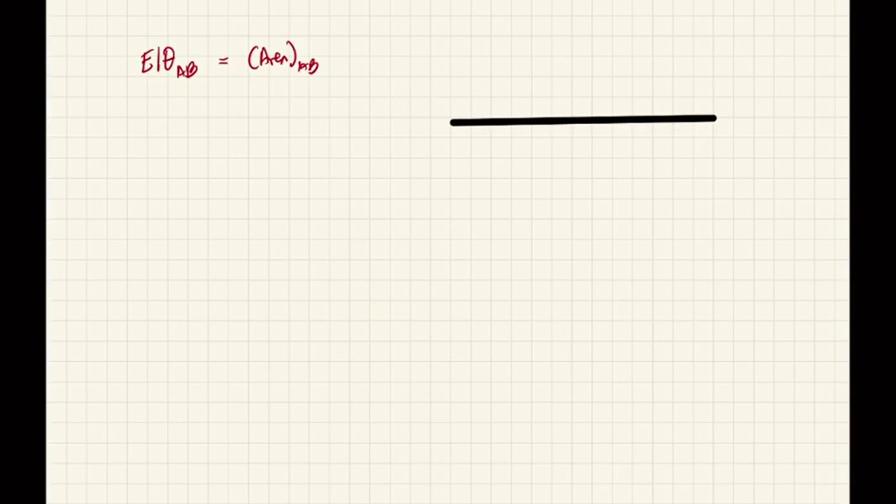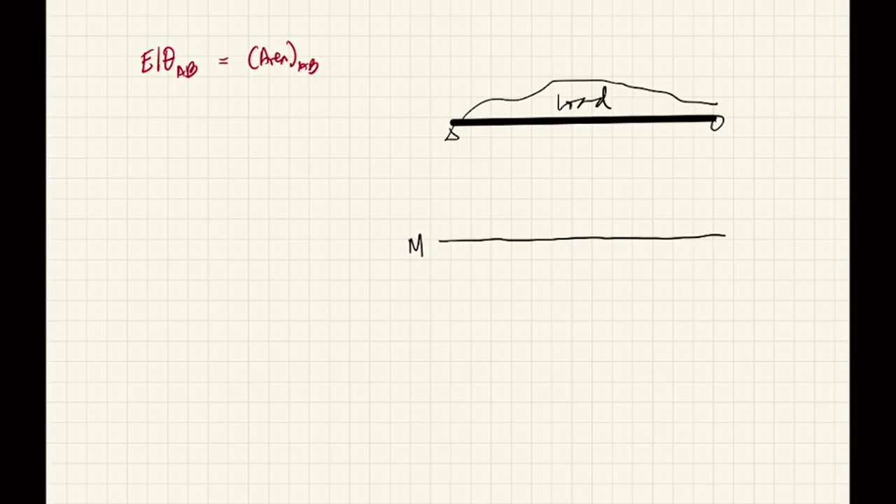Okay, let's say meron tayong beam. Tapos, let's say ganito na lang, merong loading, that's load, kung ano man yan. Tapos, gagawa natin ng moment diagram. Hindi ko na ituturo gumawa ng moment diagram by parts, kasi I believe na nakuha nyo na yung skill na yun sa college. So hindi na natin ituturo yun dito. Let's say moment diagram neto is ganito, ganyan, o kung ano man load yan, that causes yan. That's your moment diagram. Ngayon, let's say ibaba natin ng konti ito.

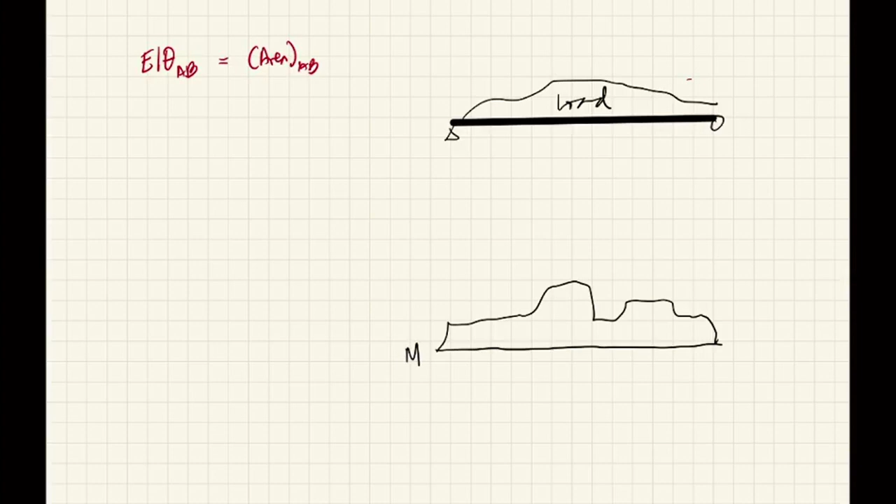Okay, tapos let's say this is because of this loading, ito yung elastic curve ngayon ng iyong beam. Mag-assign na lang tayo ng dalawang points A and B. Let's say this is point A, and this is point B.

Okay, kailangan, itong EI, that's flexural rigidity, EI. And itong theta - theta is change in slope, not the slope themselves, change in slope between A to B.

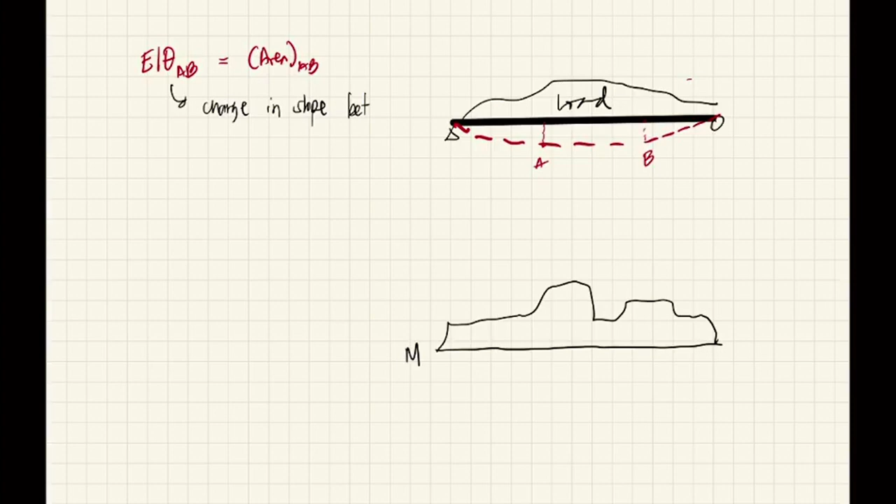Ano ibig sabihin nun? Let's say na ito yung slope mo for point A, let's say that's your slope for point A, assume nila na tumama. Tapos, this is point B. So that's point B. Tapos, ang slope mo sa point B ay ito, tumama na lang din. Teka, zoom natin ng konti.

So, yung sinasabi natin dito na theta, ito yun. This is your change in theta between A to B. Nagbago siya, diba? Yung slope natin sa A is going downward, pabulusok, while your slope dun sa B is paangat. Ibig sabihin, bumangon yung slope mo. Okay, yan ang ibig sabihin ng positive na theta. Ibig sabihin, your slope is, from your first point, downward, tapos your slope became upward. That is positive theta.

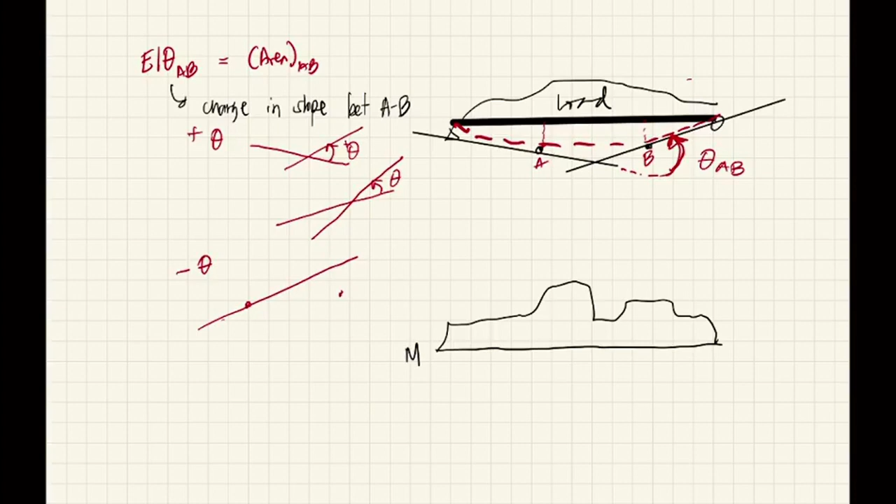Or siguro, if your slope is already rising from the first point, pero umangat pa siya, ganyan yung ibig sabihin ng positive theta. Ibig sabihin, basta yung positive theta na AB, ang ibig sabihin yan is nag-rotate pa counterclockwise yung iyong slope. Ibig sabihin, umangat, bumangon, lalong tumaas. Pero kapag ka naman negative theta ang pinag-uusapan natin, ibig sabihin, from one point rising yung slope mo, and from the other, ipababa yung slope mo. Ibig sabihin, probably ang shape ng beam mo dyan is ganito. Malungkot ang beam mo, kasi rising na siya, tapos bigla siyang bumulusok ulit. So, this is a negative theta.

Okay, so dapat ay alam nyo na kung ano yung sign convention natin sa theta at saka sa deviation. So, paano kinukuha itong theta na to? Ang sabi, kumpitin mo lang yung area dun sa AB. Ibig sabihin, kumpitin mo lang yung area dun sa moment diagram.

Teka, parang maganda i-highlight na lang yun. That is your area AB. Divide mo na sa EI. This is your area AB, divide mo lang sa EI. From A to B is equal to the area between A to B times the moment arm relative to point A. Anong ibig sabihin na naman nun?

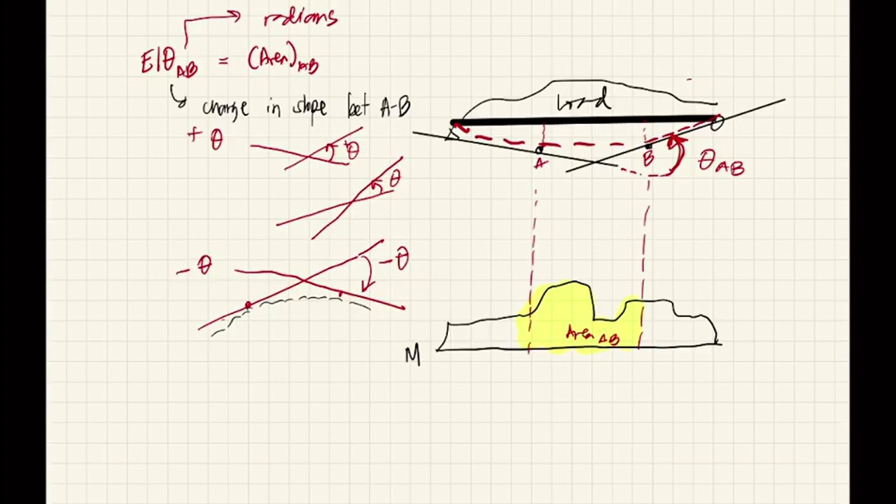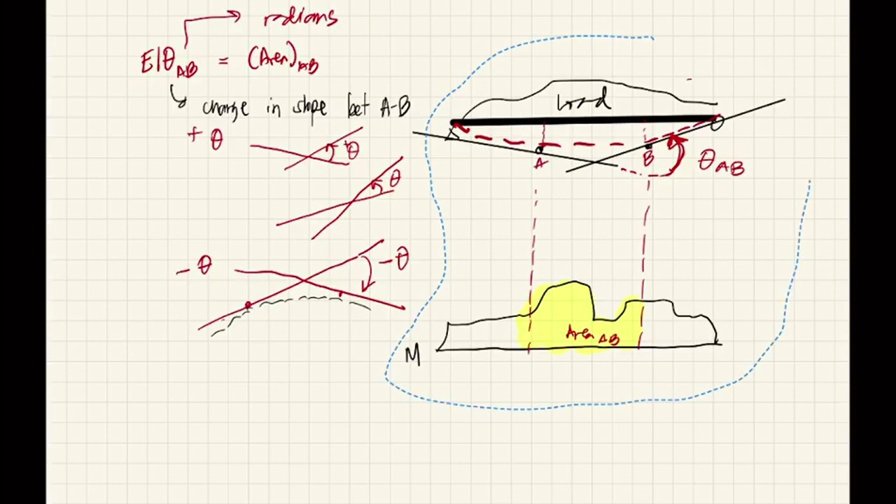Okay, so dyan ulit tayo sa workspace natin. Paliwanag natin ulit. Tapos, siguro mag-next page na lang tayo. Pero kunin natin yung figure. Ito, kunin natin. Teka, dapat na bang kunin to? So, anyway.

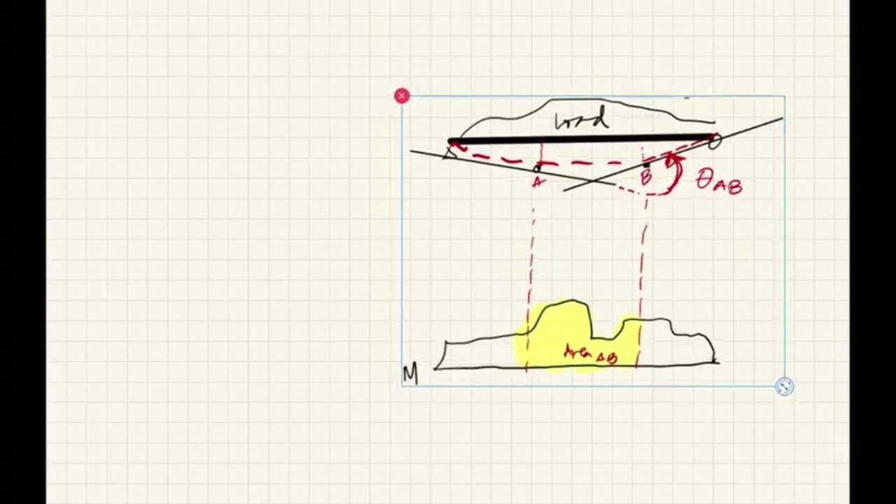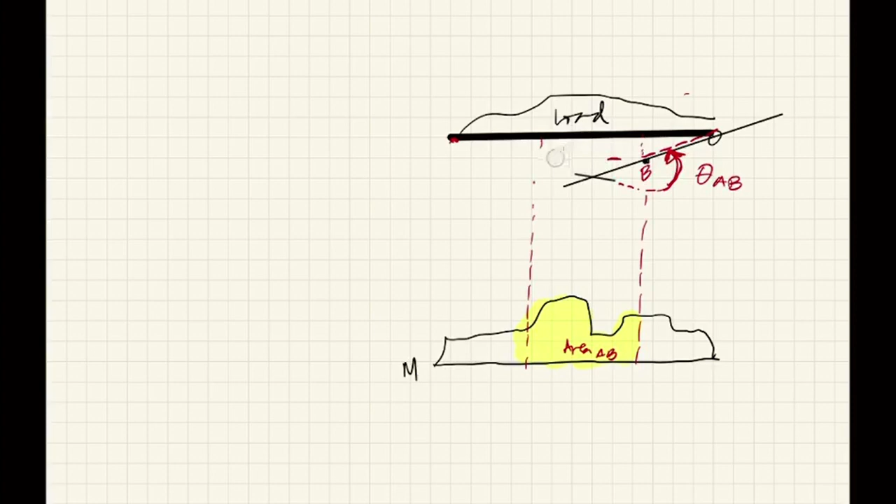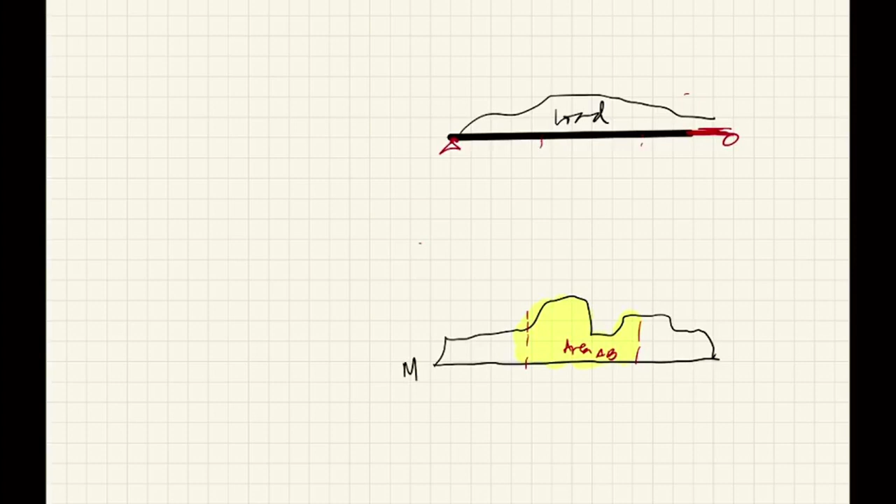Teka, focus naman tayo sa deviation. Napapansin nyo na sa area moment diagram, syempre, hindi ka makakapag-proceed sa solution kung hindi maayos ang moment diagram mo. Okay, so mahalaga na marunong ka mag-drawing ng moment diagram ng tama. Dito sa example natin, we have that beam. Tapos, ayun ulit, let's say this is its elastic curve because of the load na naka-apply dun sa beam.

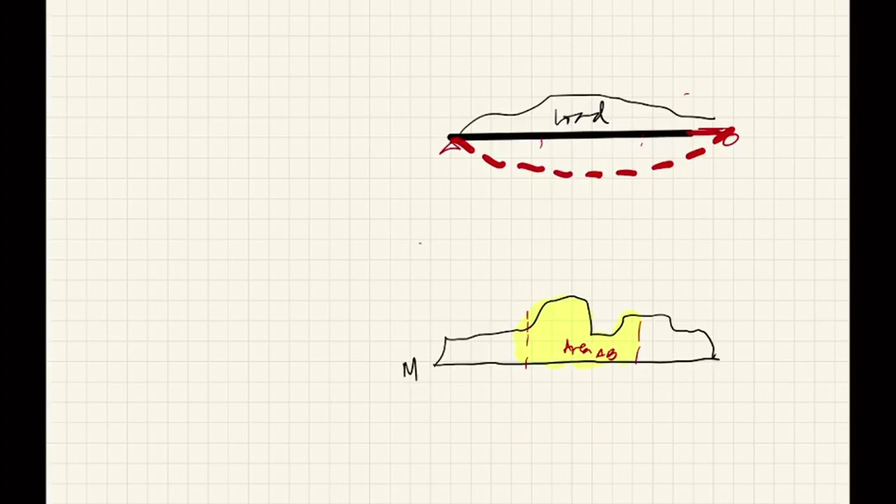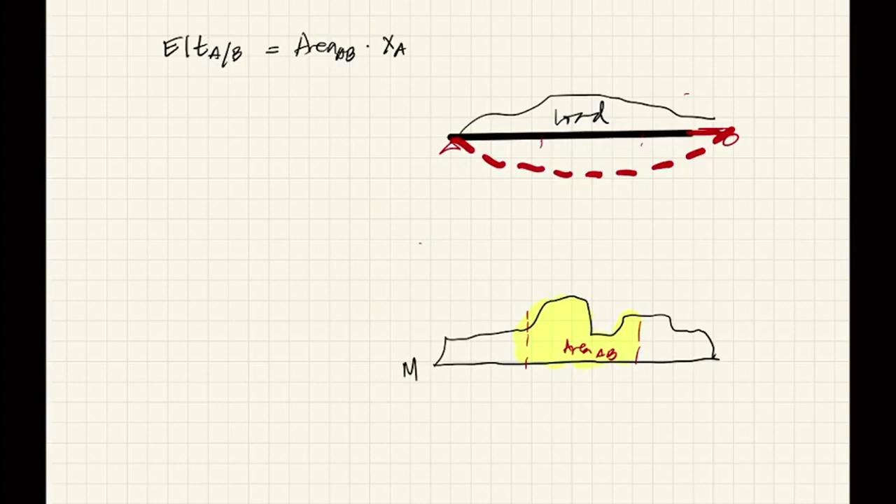So ibig sabihin ng deviation, ang sabi rin sa formula ay ganito: EI times the deviation from point A with respect to point B is equal to area AB times X with respect to A. Okay, let's assume points A and B na lang ulit doon sa ating beam. This is point A and this is point B.

May kinalaman ulit ang magiging area natin sa moment diagram sa mga points na yun. So this is point A, tapos si point B, ito. Tandaan mo, yung unang letter dito, ito yung point. Si point B naman, siya nang gagaling yung slope o yung tangent line.

Okay, so ito yung tangent line. Let's say yung tangent line, tangent line to point B. Ito yung deviation na tinatawag natin. Kung gaano kalayo si actual point A doon sa tangent line drawn from B. Pagka binasa mo kasi yan ng buo: deviation of point A with respect to tangent line drawn from B.

Okay, yan yun, ito yung deviation natin. Diba ito yung slope galing sa may point B. Ito yung actual na point A nung na-deflect na yung beam. Kung ano man yung deflection na yan, tA/B, mako-compute mo yan using this formula.

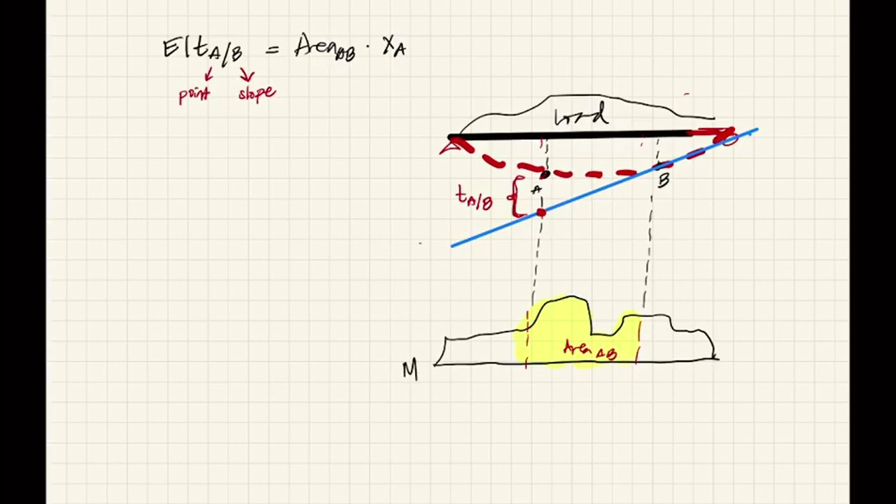Sabi, area AB, i-multiply mo yan sa moment arm from A. Kaya ang tawag dito is area moment, kasi nagmo-moment ka ng area. Parang gano'n lang ang idea dyan.

Okay, so ang gagawin mo lang is kunin yung area AB. Kunin yung area AB to, and dapat alam mo yung centroid niyan. Let's say ito yung centroid niya.

Tapos imo-moment mo siya doon sa point, hindi doon sa pinanggalingan ng slope. So ito yung XA. Moment mo lang siya, moment mo siya about this point. So area na AB, multiply mo sa moment arm niya with respect to point A. Ganun lang kadali ang area moment.

Okay, so given that, sign convention tayo. This is a positive deviation. When you say positive deviation, the point is above the tangent line. When you say negative deviation, edi otherwise, the point is below the tangent line.

Anong example nun? Halimbawa, meron tayong ganito. Ito yung beam, let's have a cantilever beam. Tapos, teka, nipisan natin yan, kulay mo natin ito.

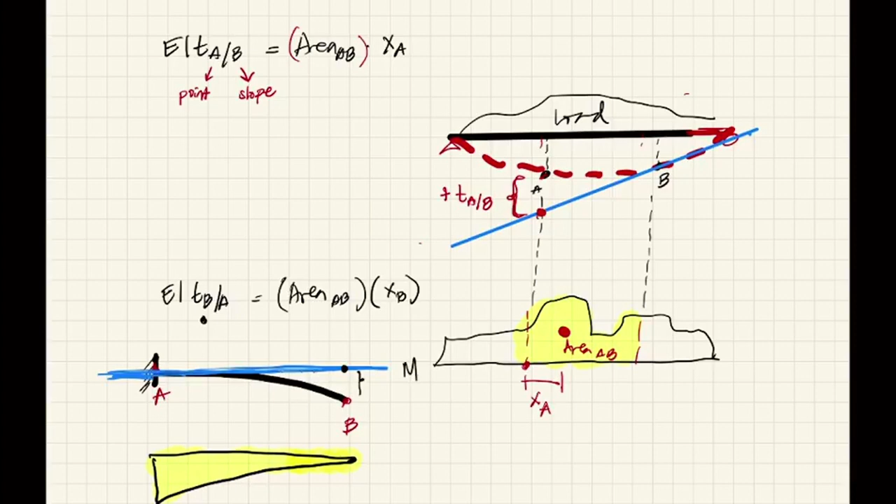Okay, when you say deviation of point B, sabi natin, deviation of point B with respect to A is equal to area ng moment diagram between those points. Tapos, kung ano yung point, okay, diba this time the point is B, doon ka magmo-moment arm. And the slope is perfectly horizontal. So when you are saying deviation of point B with respect to point A, kunin mo lang yung level ng tangent line, nakatapat ng point na hinahanap mo. Tapos ito yung deviation ng point B from point A.

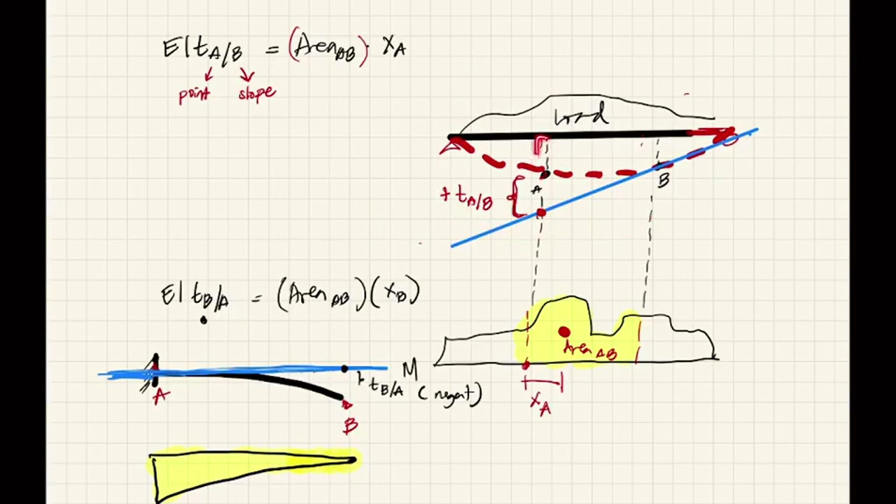Di ba? Tignan mo to. Dito sa may simply supported beam, ito yung deflection, tama ba? Pero in area moment method, the formulas do not specifically calculate the deformation.

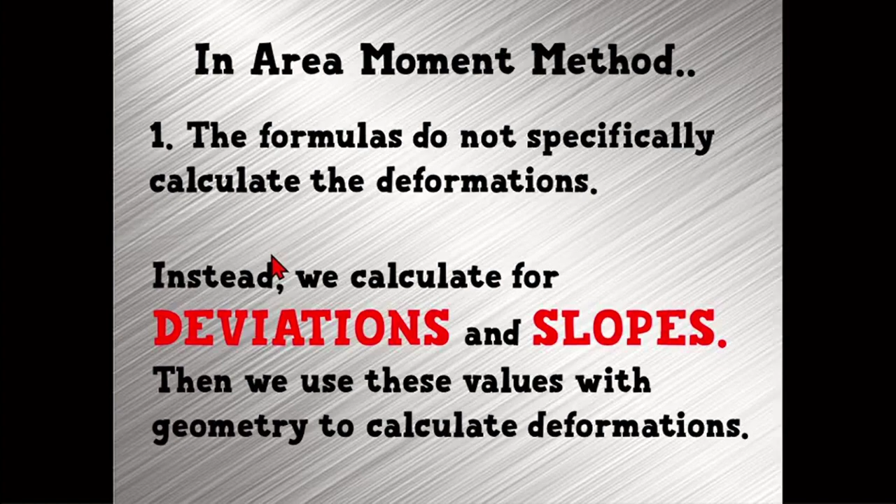Sabi ko nga, deviations are not deformations, or the deviations are not deflections. Instead, we calculate deviations and slopes. Then we use these values with geometry to calculate the deformation. So similar triangles, trigo, SOHCAHTOA, ayan.

Instead of drawing the moment diagram in a conventional way, we draw the moment diagram by parts. Sabi ko hindi ko na yan i-explain because you already know that. Okay, so we base our calculations on a moment diagram, so we want it to be as simple as it can be. Ayaw natin ng mga magkaroon ng nag-criss-cross na parabolic segments, parabolic spandrels. Ayaw natin ng parabolic lines.

So next, where do we assume fixity? When you say fixity, kung saan mo ina-assume yung fixed point ng isang beam. Anyway, ipapakita natin yan sa mga examples. Okay, so dyan tayo sa workspace natin, ito yung una natin situational problem.

So for the beam supporting the loads shown, binigay yung E at saka yung I. Okay, and yung load, yung UDL pero hindi continuous. So that's okay. Sabi, what's the value of the deviation of point A relative to tangent line at C in millimeters? Ano yung slope sa C? At ano yung value ng deflection sa point B?

Okay, so let's do that sa workspace natin ulit. Sa ating, yan, okay, and yung figure, and yan na rin yung mga tanong. Wait lang ha.

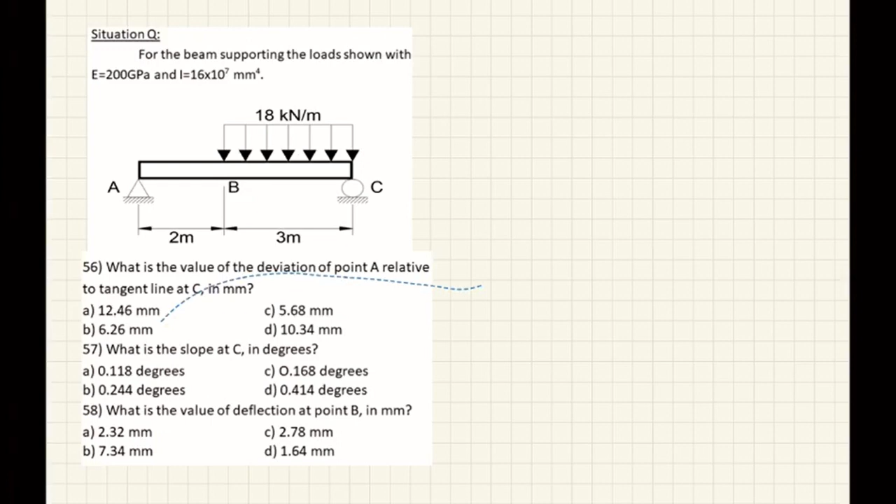The very first thing you need to do when you make a moment diagram or conjugate beam is, of course, the moment diagram. But before that, we have to get the reactions here and here. Calculate: 18 times 3 times 3.5 divided by 5.

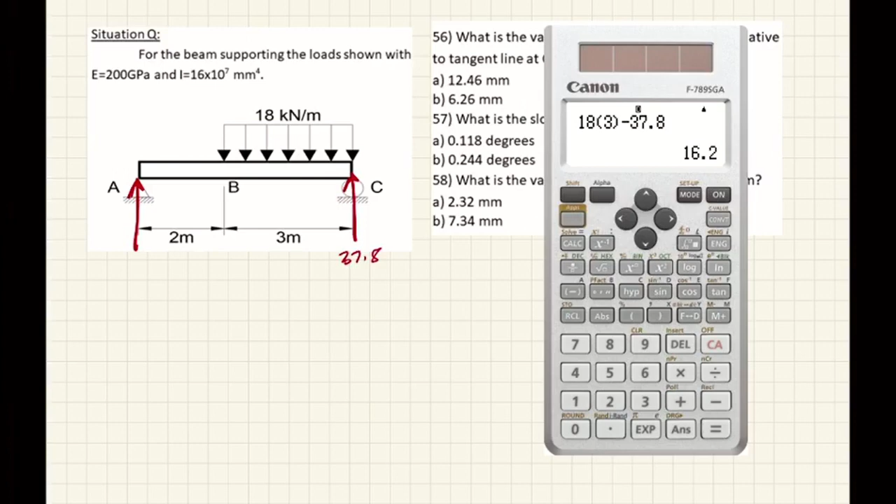16.2. Okay, so that's enough. Then next, moment diagram.

When we say fixity, that's the fixed point. You can assume fixity here, but that's a bit hard, because how would you draw the moment diagram if the fixed point is this? So you can assume fixity instead here at point C, no problem with that. Again, when I say fixity, we are assuming that support is fixed.

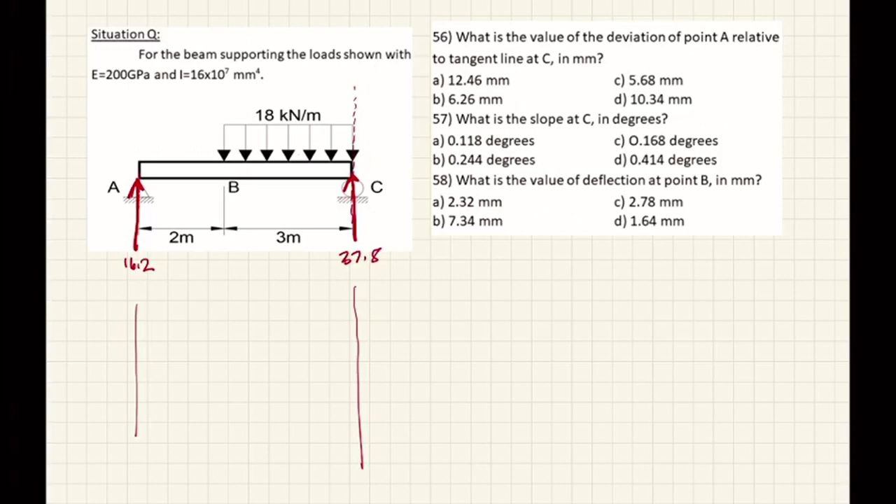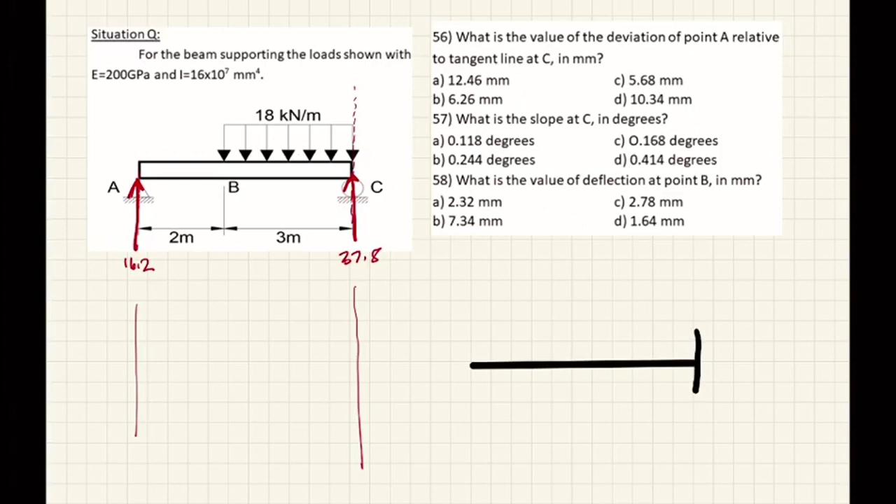This is so we can draw the diagram, moment diagram by parts. If this point is fixed, let's redraw that beam. See, that's fixed. I changed it, same beam, same loadings, but all supports are not existing. Then there's a reaction here: 18 kilonewtons per meter, and 16.2 kilonewtons.

If this is the loading, the type of loading we have on the beam, our moment diagram will be like this. Because of this 16.2 kilonewton load, 16.2 times 5, the moment is positive, of course. So that's first degree - I won't explain the making of the moment diagram by parts anymore.

Since this is a point load, it looks like a horizontal line in the shear diagram. So in the moment diagram, it becomes a first degree line. This is 16.2 times 5. Times 5, 162, 81.

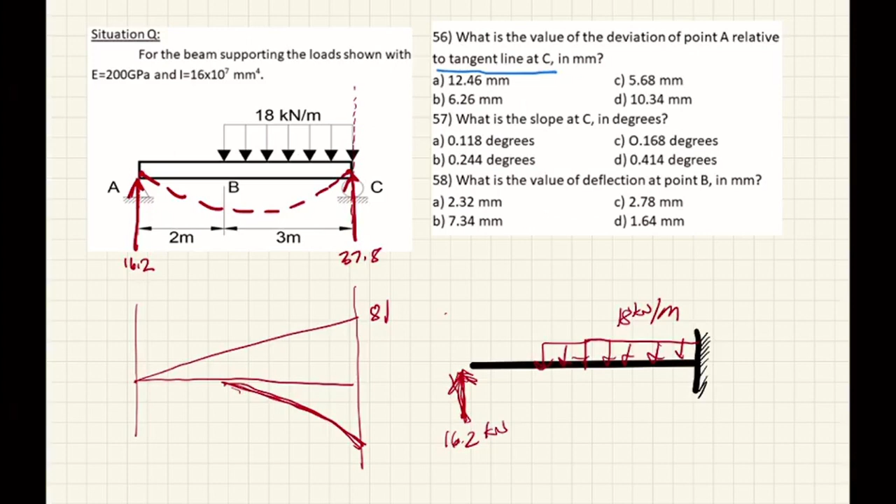But I have a feeling it's better to fix here. The tangent line at C is our reference. So this is it - the tangent line would likely go like this. Yes, that's your tangent line. What we're looking for is the deviation of point A relative to the tangent line at C. This is point A, and this is the slope at C.

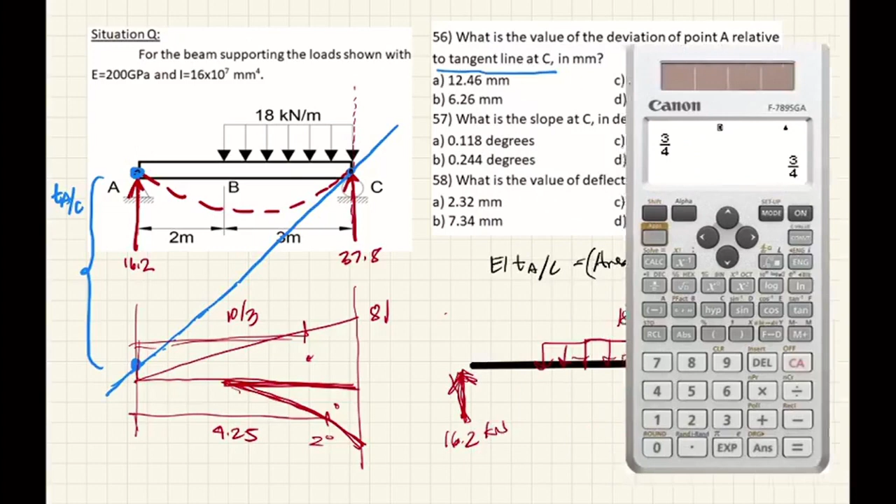Okay, let's compute. Let me change the setup a bit so I don't forget the calculator steps, similar to before. Area AC - let's start with the triangle first: that's 1/2 times base 5 meters times height 81. The moment arm from point A is 10/3 as discussed earlier.

Then plus or minus, since that area is at the bottom, that's negative area: 1/3 BH, that's the parabolic spandrel. Base is 3 meters, height is - wait, what's the height? We don't have that yet. What's the moment given by this UDL at the fixed point? That's 18 times 3 times 1.5, sorry I hadn't put that in yet - 18 times 3 times 1.5, that's 81. That's negative 81.

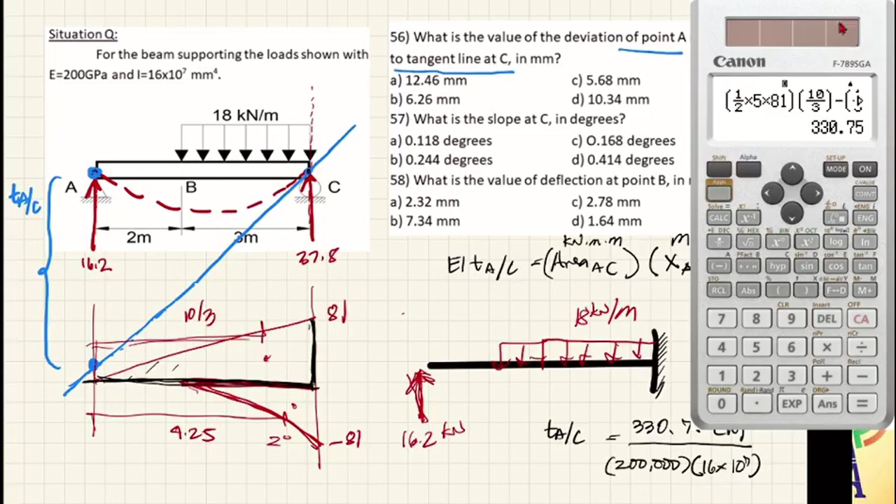Anyway, let's try solving. Ano ang kalalabasan niya? Oh, teka, saan ko ba pwesto? Hindi na lang. 330.75 times, ay parang kulang yung 10 raised to 9. Alam ko 10 raised to 12 yun eh. Yan, 0.0103. Pero let's try, ano ba sagot yan?

Oo nga. Teka, sandali. I-analyze pa natin sandali yung unit. Alam ko kasi 10 raised to 12 yun. Yung area, wait, kilonewton meter to kasi naka-moment. Tapos times meters, that's kilonewton meter squared. Kilonewton meter cube pala, sorry. Kulang. Ulit natin yung discussion ha. Ang unit nito is kilonewton meter. Okay, so ito yung sagot natin.

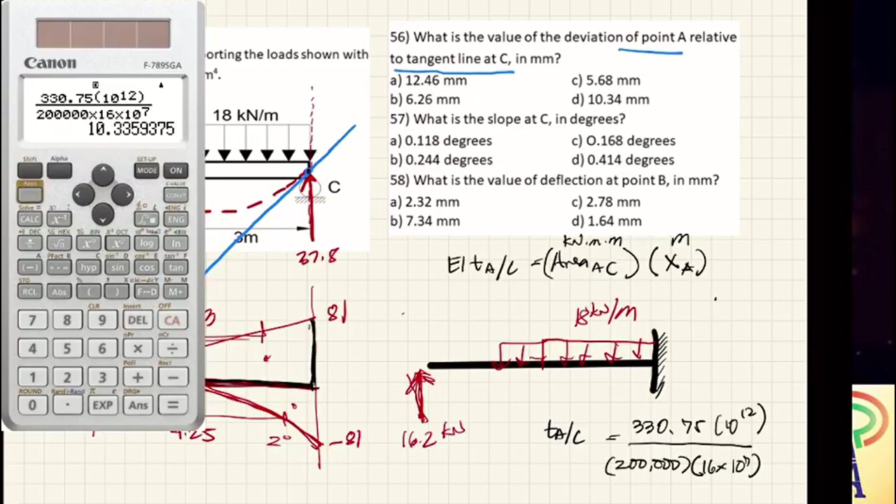Oh, teka, yan. The deviation of point A to point C as shown in this calculator is 10.34. Okay, so sulat natin, it's 10.34 mm. Okay, so ito yun. Exaggerated lang yun. That's 10.34 millimeters. Okay, so yun ang sagot natin.

Okay. Tapos, slope at C in degrees. Pag sinabi mong slope at C, edi ito. Ayun o. It's angle from the horizontal. That's very simple kasi meron ka ng triangle. Ayun o. 0.118 degrees. Okay, so ito yung sagot natin. I hope na nakasunod kayo sa discussion.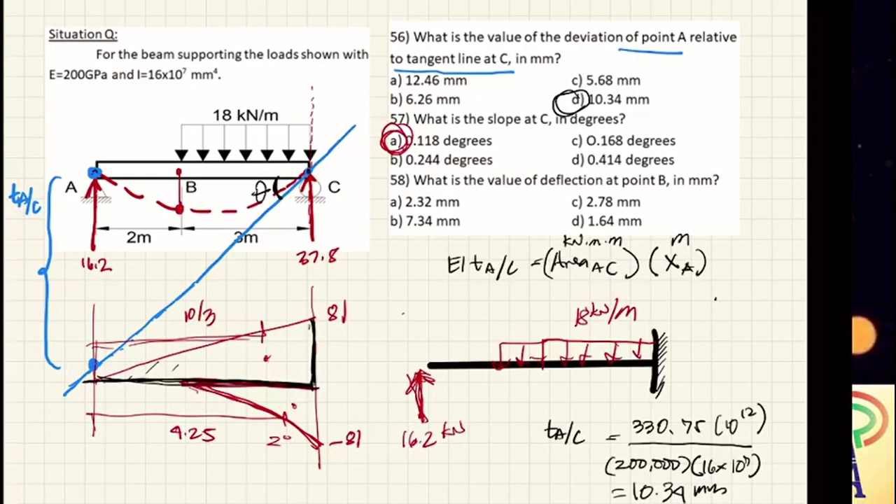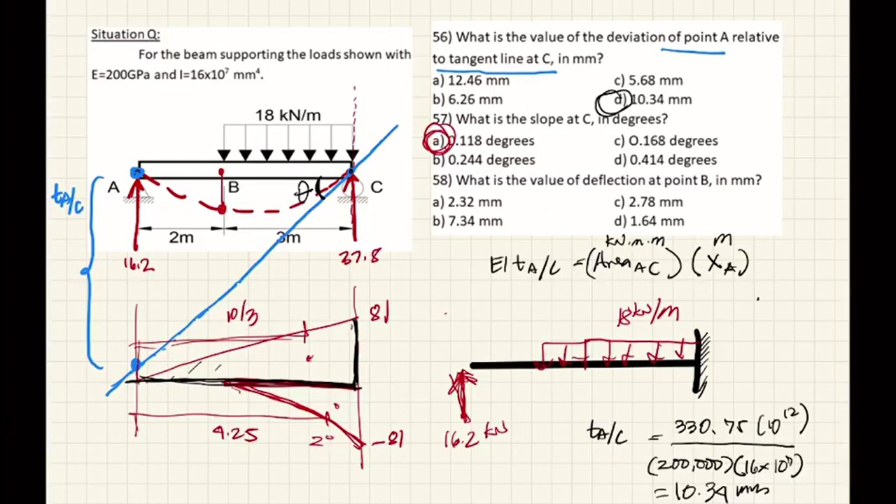And next is, what is the deflection value at point B? Ito na yung hinahanap, deflection at point B. Okay, so sunod na sheet natin yung sagutan. Wait. Okay, so kopyahin natin muna to. Kopyahin.

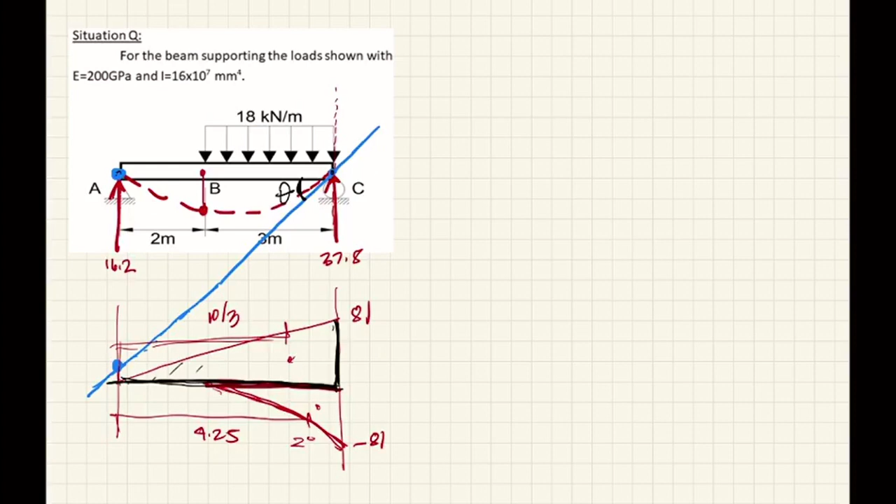Okay, pag-isipan mo ngayon, paano mo yan gagawin? Paano mo kukumpitin yung deflection dito? Oops. Ito. Okay, so actually, kung makita mo to, pwede mong kunin to, the deviation from point B relative to point C. Tama ba? Pwede ba kunin yan? Oo, pwede yan. Okay, kailangan mo lang kunin yung area nito. Yan o, area involved between point B to point C.

Tapos, i-moment mo sila doon sa point B. Okay, and there you have it, the deviation of point B with respect tangent line at drawn C. Okay, drawn at C. Pero ayoko gawin yun. Okay, pakita natin na for this particular question and in deflection sa B, mas magandang drawing ng moment diagram by parts na ang fixity ay nandun sa B. Okay, tingnan natin, mas madali kasi yun eh.

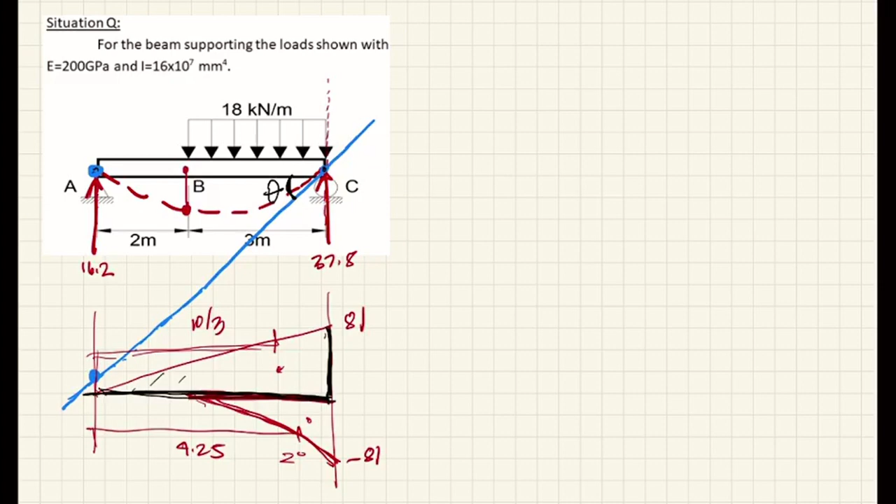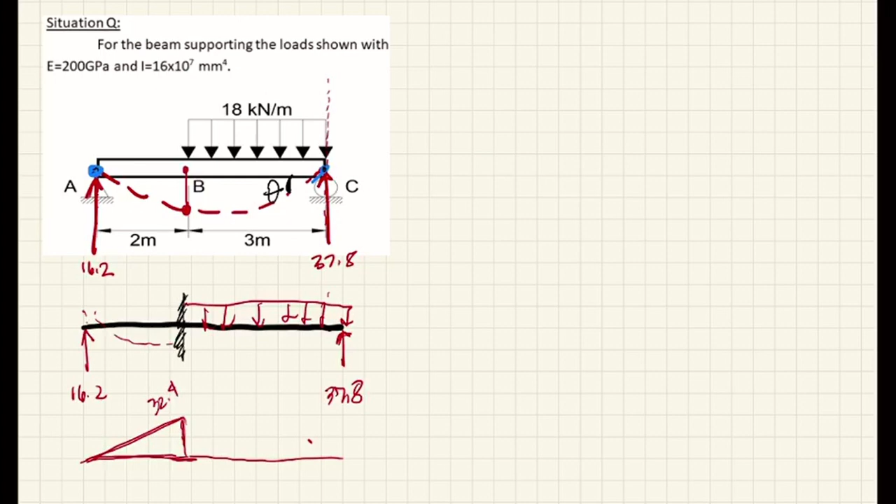Wait. Brain natin to. Okay, ang sabi natin, mag-a-assume tayo ng fixity at point B. Ibig sabihin, we will assume that this point B is fixed. Okay? Then, with that fix, you have the reaction dito na 16.2. You also have this 37.8 sa kanan. 32.4. Okay, tapos para naman dun sa kabila, 37.8 times 3. Dati yung calcu. 37.8 times 3, that's 113.4.

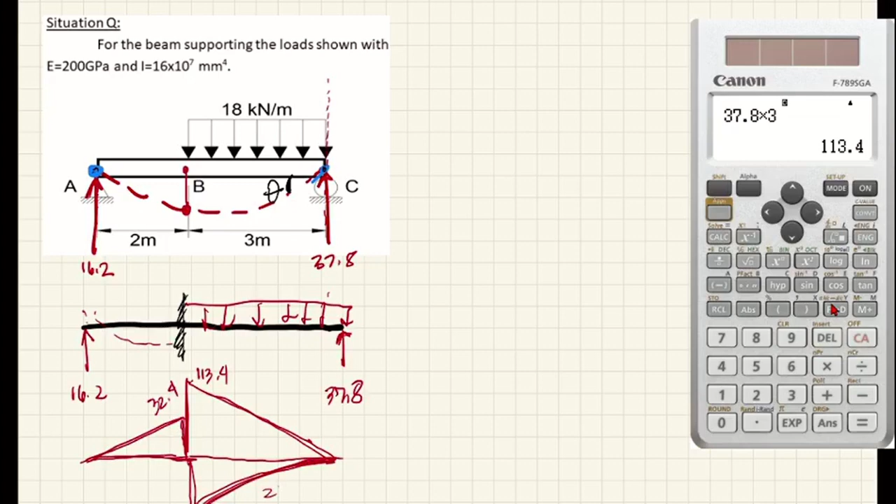Okay, tapos for this UDL, that will cause a negative moment para dito sa beam. So ganito magiging itsura niya sa moment diagram by parts. Ganito. Again, nasa second degree line. Okay, tapos ano yung kanyang value? Ano yung magiging moment niya dito sa pader? That's 18 times 3 times 1.5. So that's 81. Negative 81.

So, if you are looking for the deviation of point B, if you're looking for the deflection at point B, deflection at point B mismo, so ganito gawin natin. Diba, ito yung original position ni beam ABC. Ito yung mga supports niya. Tapos, ito yung deflected na shape niya. Yan, we want the deflection here at this point. Ito yung gusto natin.

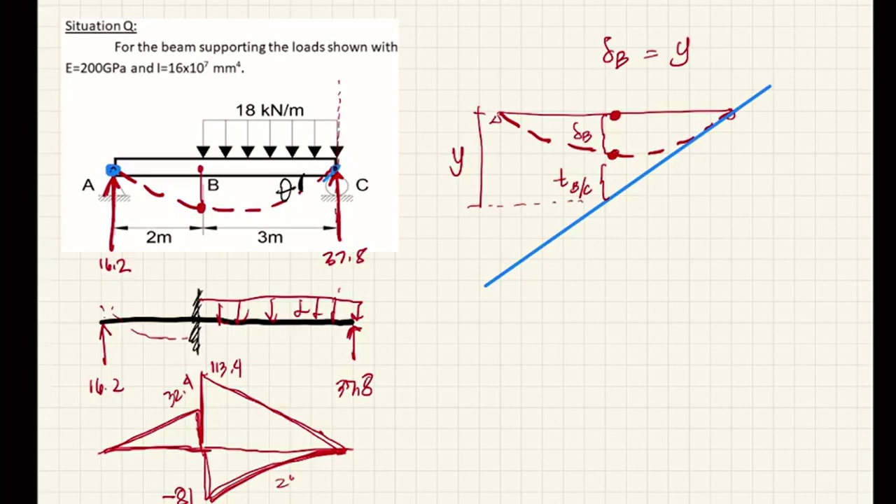So once I get this side, then subtract the deviation, what I'll get is exactly the deflection asked in the problem. Let's say this is the total height of the triangle, let's call that y. So we can say the deflection at point B is equal to y, the height of that triangle, minus the deviation of point B relative to point C.

So let's get the deviation first. Deviation of point B relative to point C equals the area from B to C, times the moment at point B, since point B is what we're discussing, not the origin of the tangent line, divided by EI. Let's try to compute that.

Let's go to the calculator. Area BC, there are two areas in BC: a triangle and a parabolic spandrel. For the triangle, let's say 1/2, base is 3, height is 113.4. The moment arm from point B, since this is 3 meters, the centroid is at 1 meter, times 1 minus 1/3.

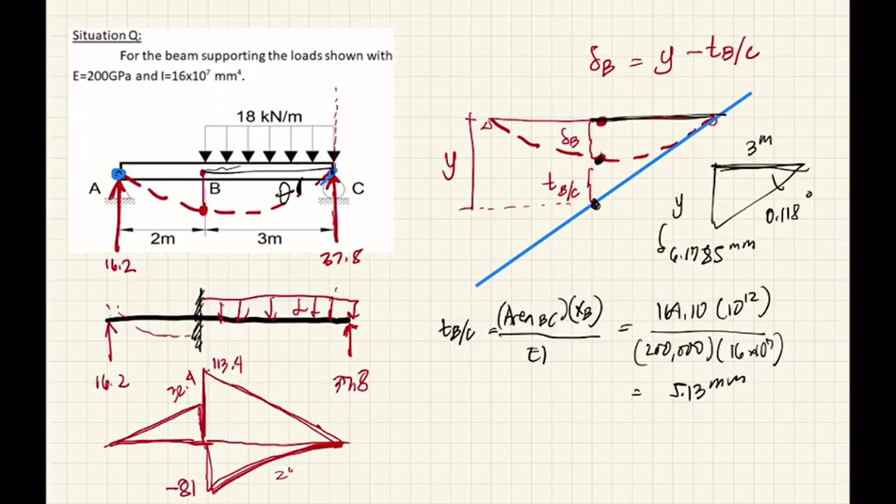That's right, that's it, this is 109.35. The area computation earlier was wrong. Let me redo this, then 16 times 10 raised to 7, 200,000, okay so that's 3.41, this is 3.41 millimeters.

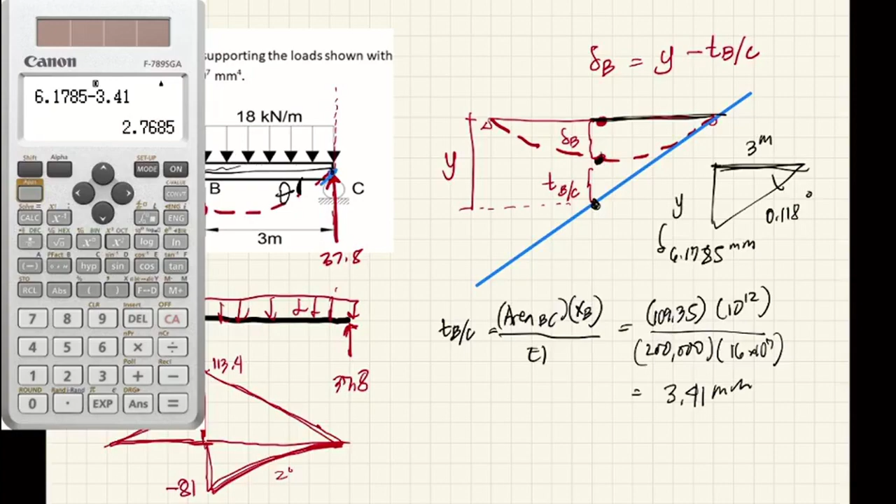So if we subtract 3.41 from 6.17, we should correctly get the deflection at B. Right? So that's 6.1785 minus 3.41, that's 2.77 when rounded off, or close enough to the correct answer of 2.78 millimeters.